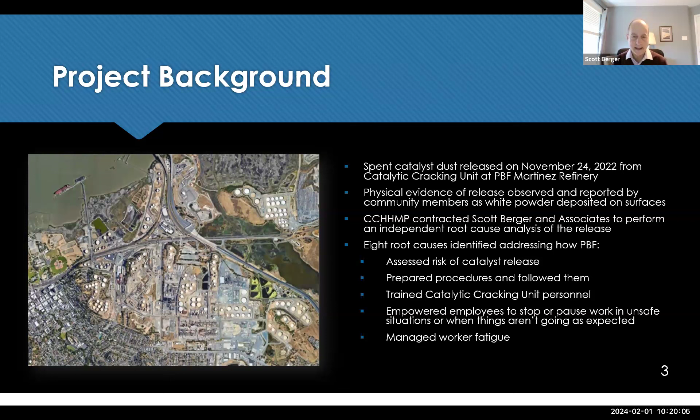We identified 8 root causes in our investigation that broadly cover the way that PBF assessed the risk of catalyst release, the way they prepared their procedures and followed them, the way they trained the personnel that are operating the catalytic cracking unit, the way they empowered their employees to stop or pause work in unsafe situations or when things weren't going as they expected them to, and also in the way that they managed worker fatigue. So we'll get into that in just a bit.

We'll talk about our objectives for the investigation and our approach. We'll present a brief overview of catalytic cracking and how that is supposed to work. Then we'll talk about how the incident evolved, the steps leading up to it, and what happened during the incident. We'll discuss our root causes and our recommendations to address them. We were asked by the Oversight Committee to also look into the subject of the use of wet gas scrubbers compared to electrostatic precipitators. The PBF refinery uses electrostatic precipitators, as do many refineries. And the question was whether, if they had been using a wet gas scrubber, that would have made a difference. And we'll talk about that. And then we'll evaluate the investigation report that the refinery prepared as part of the major chemical accident investigation that they're required to do by the county. So we'll get into all those topics and then, of course, be available to take your questions.

So our objectives were to identify the root causes of this incident. And when we talk about root causes, we specifically are talking about gaps in process safety management systems. And by process safety management systems, we're talking about policies, procedures, standards that the company has, and the way that they are managed by the company.

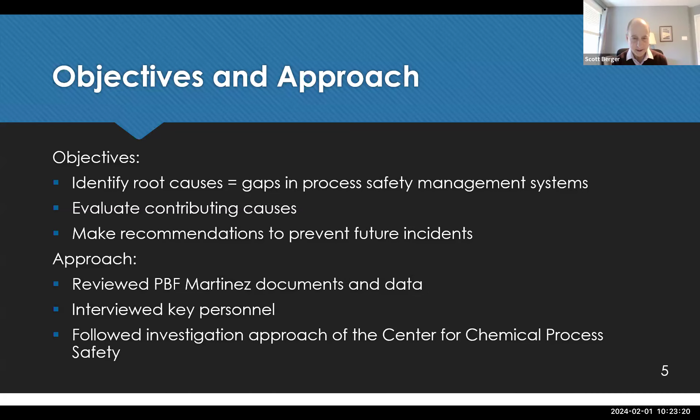The way we went about doing this investigation was, first of all, to review a long list of documents that we requested from the refinery and that they provided to us, as well as data for the process that we went over in detail. We interviewed key personnel, and I do want to acknowledge all the personnel at PBF that we talked to, because we really feel that they provided very good, freely offered input that was useful for us in conducting this investigation. And overall, we followed the investigation approach that was published by the CCPS, the Center for Chemical Process Safety.

So now let me turn to the catalytic cracking and how, in general, this works. And we focus here on this slide on 4 major units in the refinery. And of course, in the PBF refinery, as in most refineries, there are a lot more units in the overall catalytic cracking process than we're showing here. We simplified it, taking out the pieces of equipment that aren't relevant to the incident, just to make it easier to understand. And we start in the center of the slide here with a reactor, and this is where the cracking takes place.

There's also a stripper, and we'll talk about its function in just a bit. A regenerator that takes the catalyst and makes it ready for reuse. And also over on the left-hand side, the main fractionator. This is a distillation column that receives the product from the reactor and transfers that product to other columns for additional processing.

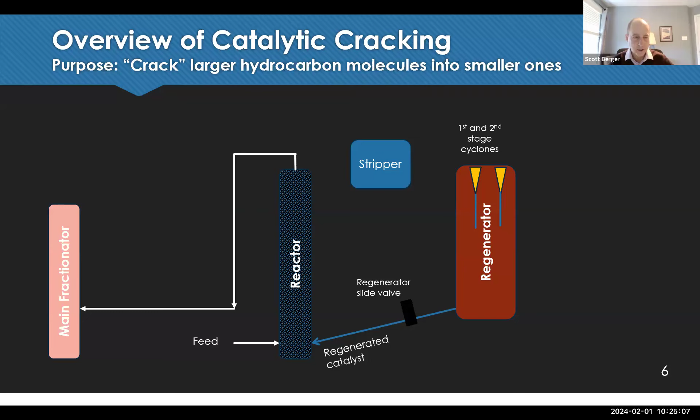Now, the main action for catalytic cracking occurs in the reactor, as I mentioned. We basically have a heavy hydrocarbon feed that goes into the reactor along with catalyst. They're introduced at the bottom of the reactor, and they flow upward through the reactor as the reaction takes place. The cracked gases come off the top of the reactor and pass over to the main fractionator, where that additional separation is done.

The lighter components that come from the main fractionator will then pass to a tank known as the overhead accumulator. From that overhead accumulator, the product is isolated and taken on for additional processing in other columns. In addition, the overhead accumulator discharges to a device known as the wet gas compressor. And this serves as a pressure controller, essentially, for the main fractionator and for the reactor. And that's its primary function there.

So from the reactor, the catalyst now will pass over into the stripper. That's the next vessel over to the right. And in the stripper, any residual hydrocarbon is removed from the catalyst using steam. And so that steam and hydrocarbon leaves the stripper and joins the stream flowing over to the main fractionator. And then the catalyst accumulates in the stripper. Now, from the stripper, the catalyst will flow through a device known as the stripper slide valve into the regenerator. And it's that slide valve that is going to control the flow of catalyst that goes from the stripper into the regenerator.

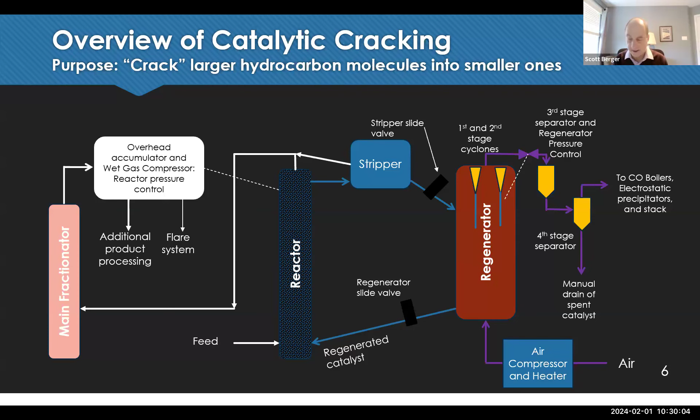Now, I have to mention a couple other things here. First of all, there is a safety device in the CCU, and that is a flare system. And if the pressure is too high or becomes too high in the reactor, the flare system can be opened, and there would then be a flaring event to relieve the pressure in the reactor and prevent an overpressure type of situation. Okay, so that explains how it's supposed to work.

Let's now talk about the lead up and the events that led to the release of catalyst. And it started back on November 21st, 2022, when the flow controller on the air to the regenerator basically failed. And so when that failed, the airflow to the regenerator stopped, and this prevented the regenerator from being fluidized. And with that situation, the CCU could no longer operate.

So when that happened, there were two interlock type actions that occurred. The first, this is the loss of the air, and then automatically the feed was diverted from the reactor. So basically the catalytic cracker was being shut down. The feed was being diverted over to the main fractionator. Additionally, as a safety measure, the electrostatic precipitators were de-energized. And this is an important safety feature that I'll talk about in just a minute.

There's one more thing I do want to mention, though. As part of restarting the catalytic cracking unit after a shutdown, one of the things that we need to do, and look over here on the left-hand side of the screen, you see propane going into the overhead accumulator. And this propane is important for the restart of the unit, because normally when the catalytic cracking unit is being started up, it's being started with air and steam.

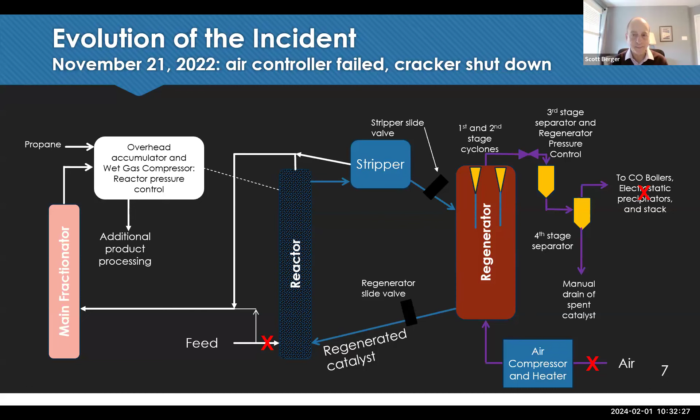Now let's talk about the electrostatic precipitators and why they're de-energized. And this largely started following a significant explosion that occurred at the ExxonMobil Torrance, California plant back in 2015. Their CCU had shut down, and during the shutdown process, some hydrocarbon was able to leak through the catalytic cracker into the electrostatic precipitator.

And you have to understand that with electrostatic precipitators, it's basically working on the principle of using electric sparks to remove particles. And so electric sparks and hydrocarbon vapor, getting those two together essentially means you're going to have an explosion. And that's in fact what did happen.

And the industry got together and realized that there were many scenarios within catalytic cracking units where if there was a shutdown catalytic cracking unit or one that was in a restarting mode, it would be possible for this kind of explosion to occur. And so the refining industry as a whole agreed that it was an important safety measure to de-energize electrostatic precipitators, basically from the time that the CCU shuts down until the time it reaches stable full operation, in order to prevent this type of accident from happening in the future.

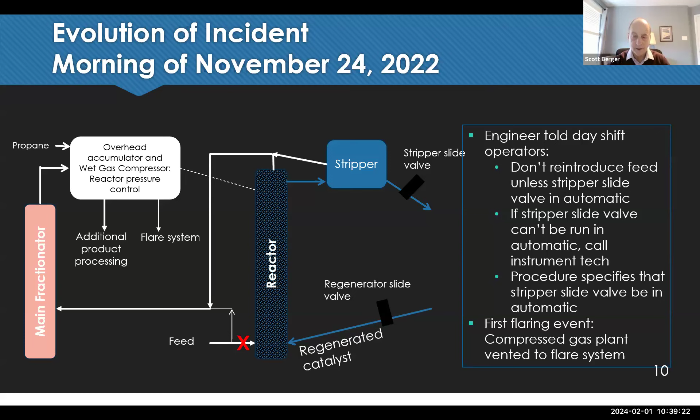Now, right after noon, the operators then began to introduce feed to the reactor, and this was done as normal, little by little, by very slowly increasing the flow rate in increments through A, as you can see on the diagram, while very slowly closing the flow through B, that's bypassing over to the main fractionator. Now, when this happened, unfortunately, the stripper slide valve was still in manual. It was not in automatic.

Now, with that initial introduction of feed, the pressure rose in the reactor, and when that happened, the operators decided to flare that pressure through the flare system, and so that became a second flaring event from the overall broader CCU complex within a very short period of time.

Around that same time, the CCU operators received a communication from refinery logistics saying that the inventory of propane in the refinery was approaching a minimum inventory level. Now, it wasn't a level that was critical that was going to prevent the startup of the CCU, but it was a communication that needed to be made according to refinery policy, and the communication did come in.

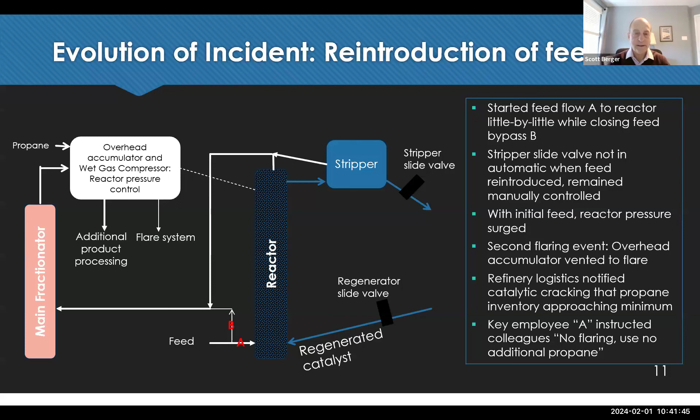Okay, so the startup continued, the introduction of feed continued through the afternoon and on into the evening shift. And again, the stripper slide valve remained in manual control over that period of time. Now, the incident actually began a little bit after 8:30 in the evening.

And again, as valve A was being gradually opened and valve B gradually closed, there was another pressure excursion in the reactor. Okay, and so basically the reaction from the additional feed going in raised the pressure in the reactor, and now without flaring, that pressure was pushing harder on the catalyst that was in the stripper, forcing it over into the regenerator.

And operators were taking action to both try to increase the pressure in the regenerator to reduce that differential pressure, and also to close down manually on the stripper slide valve to control the flow of catalyst. But it turns out that the stripper slide valve was not closed fast enough in that manual operation mode.

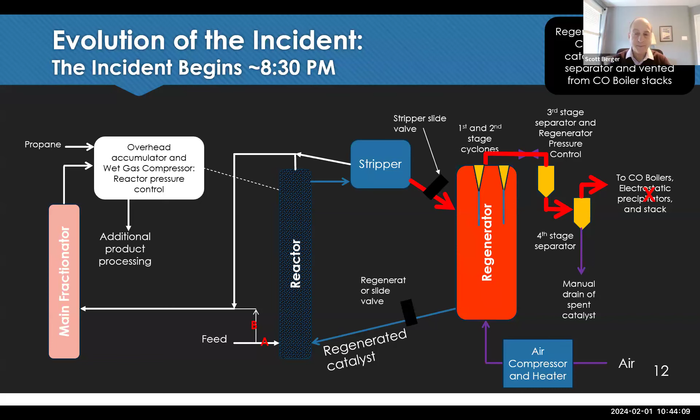And so the catalyst then passed on through the carbon monoxide boilers, through the deactivated electrostatic precipitators, and out the stack. And so this was the beginning of the catalyst release. Now, while this was happening, the personnel did not recognize that there was a release occurring. First of all, they didn't associate the fact that the fourth stage separator was at high level with a condition that would be leading toward a significant catalyst release.

Also, they couldn't rely on the opacity meter on the stack because with the electrostatic precipitator turned off, that stack opacity meter was already reading the maximum opacity level. And so since it was already reading maximum, it couldn't read any higher than that. In addition, there was a slight breeze blowing that night, 3 to 6 miles an hour or so. And it was blowing the catalyst away from the refinery, so there was no catalyst observed falling inside the refinery.

And really, the first indication the refinery had that there was a catalyst release was when they got calls from the community after daylight on November 25th. So here's a little bit more granular of a timeline. As we mentioned, the operators were continuing to increase the feed rate from noon on the 24th, and that continued on until just after 6 o'clock in the morning of the 25th.

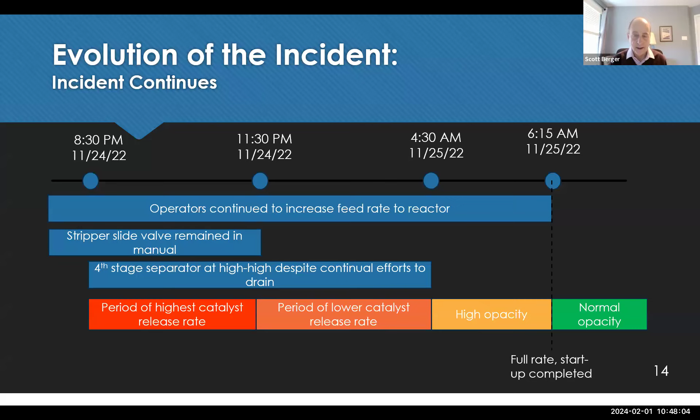Now, it's also common in root cause analysis to identify contributing factors. Now, these are things that you can't establish a direct causal link. However, if these factors had gone differently, it might have given the operators a better chance to have prevented the incident. And we identified two different contributing factors.

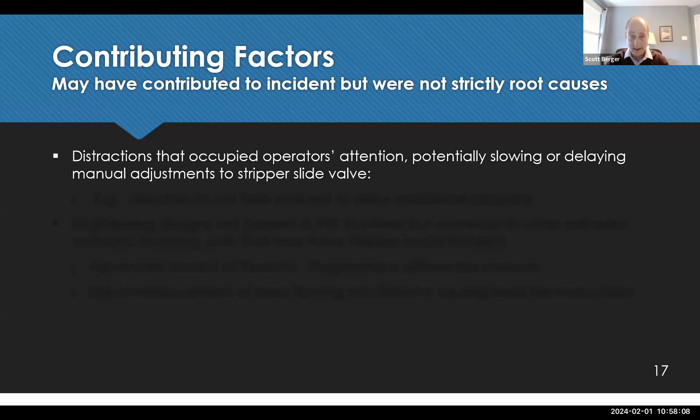And the first were a series of distractions that occupied operators' attention, which potentially either distracted them or slowed or delayed the manual adjustments that were being made to the stripper slide valve. And an example of these was that directive to not flare and the directive not to draw additional propane. And there were some other operational issues with the CCU that were additional distractions. Again, none of those caused the incident to occur, but they were more things that the operators had to pay attention to, and so they were distractions.

We also found that there were some engineering designs that were not present in the PBF catalytic cracking unit, but are common in other refineries' catalytic cracking units. Had they been present, they might have helped the operators avoid the incident. And one is advanced control of the differential pressure between the reactor and the regenerator. Now, in the PBF plant, the regenerator pressure is controlled directly by the operator, but we found that was being done properly. However, if this had been done in automatic, that would have relieved some of the burden from the operator and made the response easier.

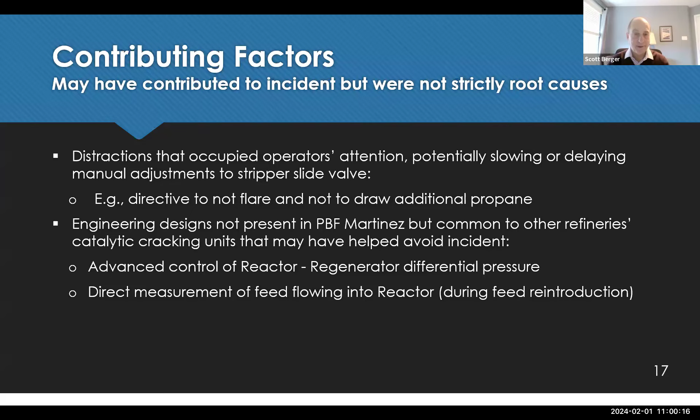Now, we were asked to talk about the topic of wet gas scrubbers versus electrostatic precipitators, because there was some speculation that had PBF been using a wet gas scrubber instead of an electrostatic precipitator, this incident could have been prevented. And there are some pros and cons of wet gas scrubbers compared to electrostatic precipitators, which we wanted to highlight here.

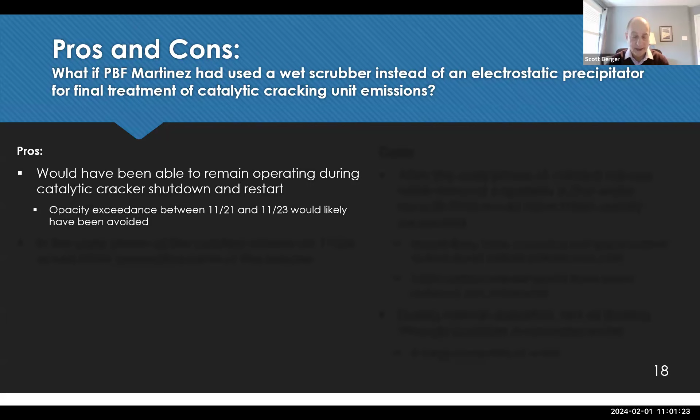So first of all, on the positive side, it's not necessary to shut down a wet gas scrubber in the case of a shutdown of the CCU. There's no electrostatic sparks involved in that process, and so if there had been a wet gas scrubber, the opacity situation that had existed before the incident would have been prevented. So that's one positive.

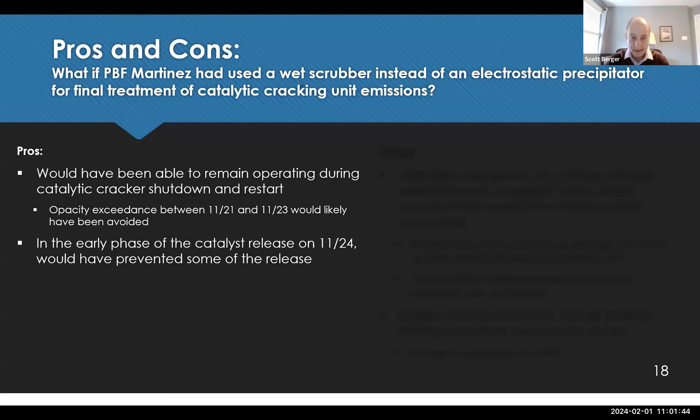And also, the wet gas scrubber would have been operating at least for the earlier phases of the release in the evening of November 24th, and it would have probably prevented at least some of the release. And we'll talk about why it's not all of the release, but it might have reduced at least some of the release. Now that takes us to the cons of wet gas scrubbers.

So think about it this way. Typically, the electrostatic precipitator is asked to remove a few pounds of catalyst fines per hour. That's under its normal situation. And if we had a wet gas scrubber instead of an electrostatic precipitator, that would have been its job, to remove a few pounds of catalyst. But in this event, it would have been receiving multiple tons of catalyst per hour.

And one of the key things to keep in mind when you're using water to remove solids from an airstream is that once the solids are in the water, they have to be removed from the water before the water can be recycled. And with several tons an hour of catalyst flowing into the solids removal equipment, it's highly probable that the equipment would have been overwhelmed and clogged up, which would ultimately have led to the shutdown of the wet gas scrubber. So the wet gas scrubber might have removed a few tons of the release, but the vast majority of the release would have continued as was experienced.

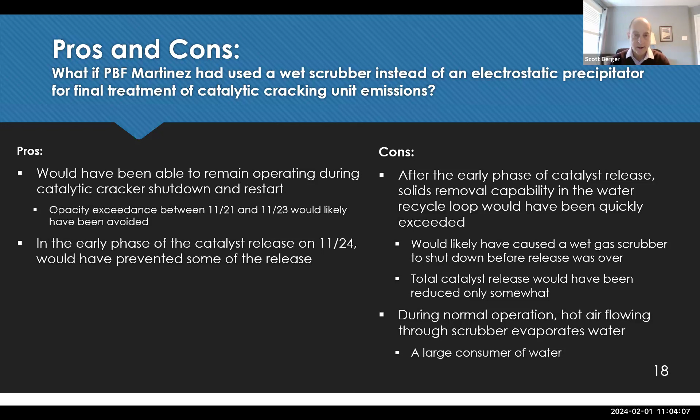But on balance, what we concluded was that while a wet gas scrubber would probably have prevented the high opacity condition before the incident, and may have somewhat reduced the overall severity of the incident, the majority of the incident would still have occurred, and therefore using an electrostatic precipitator instead of a wet gas scrubber is neither a root cause nor a contributing factor in this incident.

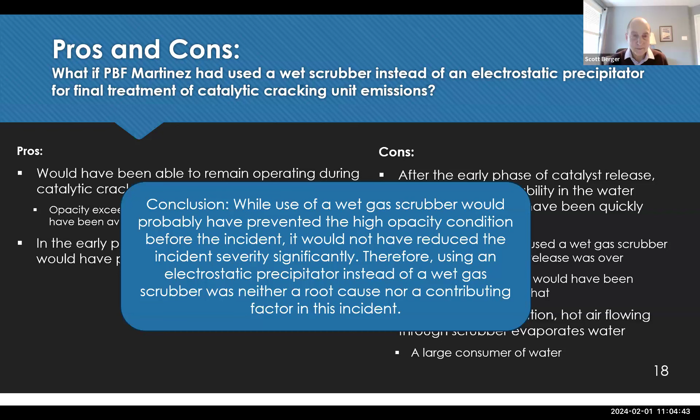Okay, so now let's get to our recommendations. Related to that first root cause of inadequate process hazard analysis, we recommend that PBF clarify their corporate guidance regarding environmental catalyst releases. And when we think about root causes, we try to prevent other incidents related to that same management system failure. So we also recommend that they review other potential scenarios where the environmental consequences of releases were underestimated.

Our second root cause had to do with deviating from procedures without managing field changes. So we make another recommendation to close that gap: to review and revise the site procedures for managing field changes to make that a more robust process. So promptly review the changes, have an appropriate level of approval, involve the appropriate personnel, and provide metrics so that refinery management can provide oversight and make sure the program is operating the way it's supposed to.

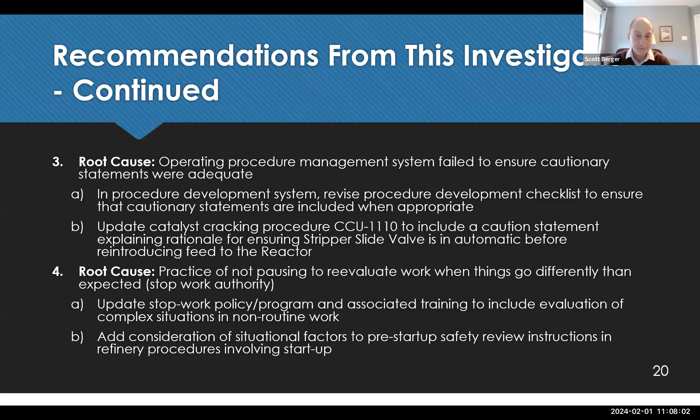In terms of just-in-time training, we recommend that the training management system be updated to ensure that just-in-time training, especially for this procedure but other relevant procedures as well, be conducted, and that it be put into the training workbook for the catalytic cracker console operators.

We also identify the operator training not addressing the rationale for alarms that signal the potential catalyst release. And we also recommended that PBF develop or update criteria for operator training and conduct reviews of training manuals to make sure the basis for all alarms that are used as safeguards are included in those training materials.

We found that the operator training did not address instrument failure modes, including the troubleshooting and when to call instrument technicians. So we recommended that PBF standardize their approach to malfunctioning instrumentation, educate affected personnel. Instead of trying to have workarounds, basically let's fix the instrumentation problem that exists. Address the failure modes of the instruments. When should instrument technicians be called? And what are the appropriate procedures in the refinery for bypassing safety devices?

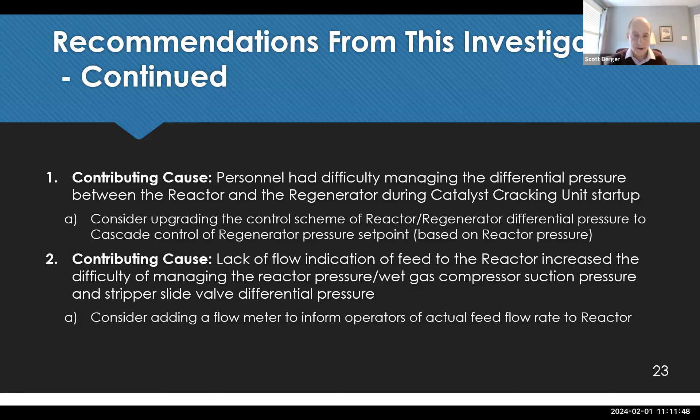For the second contributing cause, the lack of flow indication, we recommend that a flow meter be added to measure the direct flow into the reactor during this reintroduction of feed process. So that completes our root cause analysis.

We were also asked to evaluate the major chemical accident incident investigation report that was submitted by PBF to the Oversight Committee. PBF identified a total of 5 sort of combined root causes and contributing factors. The first one that was identified by PBF was inadequate manual adjustment of the regenerator pressure control valve. And we just talked about that in our recommendations as well. We found that was a contributing factor. It wasn't a root cause, but certainly deserves some attention.

Root cause number 2 was inadequate manual adjustment of the stripper slide valve. And so what we find is that this root cause puts the blame on the operator, which we don't believe is appropriate. So what we instead identified were 6 root causes related to, and you saw them: procedures, stop work authority, and training.

PBF identified a contributing factor, which was the curtailment of propane to the wet gas compressor. Our analysis showed that there was adequate propane to start up the CCU, and in fact, by the time the incident occurred, there wasn't much propane that was even required. But it was a distraction to the operators, and as such does factor into the contributing factors that we identified.